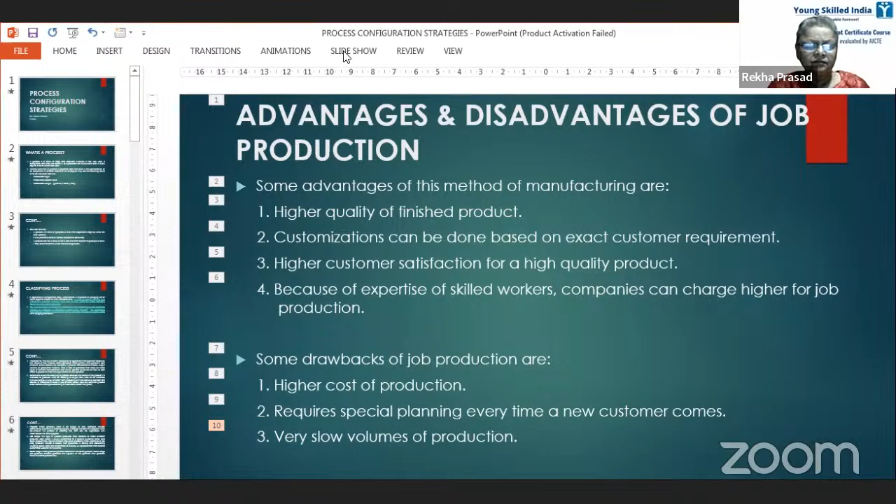Today we'll be doing process configuration strategies. Because as you know, any production or operations management is input, process, and output. In that process, we are adding value to the input, so the output is more valuable than the input, whether you are producing any product or doing any service. This is the basic function of production or operations management.

Now Arshita, you are the only one, so you just read it out. What is a process? Ma'am, I read it. Okay, because you are the only one just now.

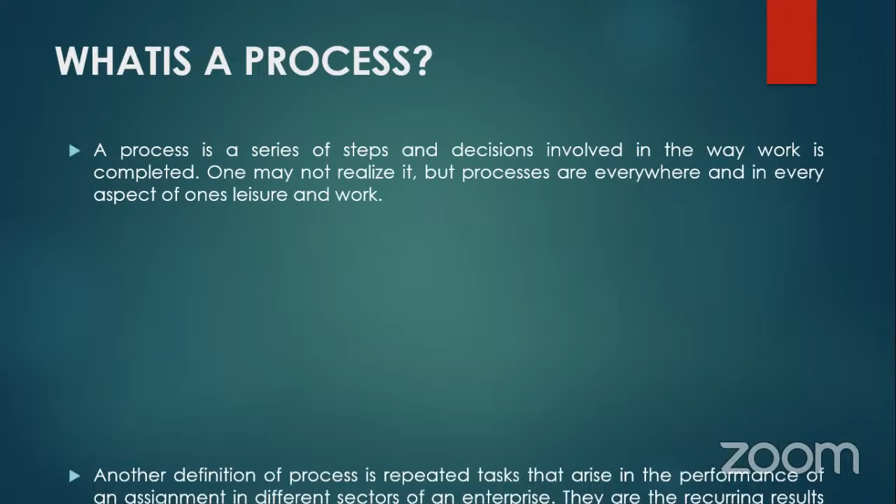A process is a series of steps and decisions involved in the way work is completed. One may not realize it, but processes are everywhere, in every aspect of one's leisure and work. So wherever you are doing something, that process is going on. Even if you are relaxing, listening to music, doing yoga, or enjoying a movie, that process is going on. Whether you are at work or at leisure, process is going on. Even if you are sitting idle, that form of relaxation is also a process, giving you calm and pleasure.

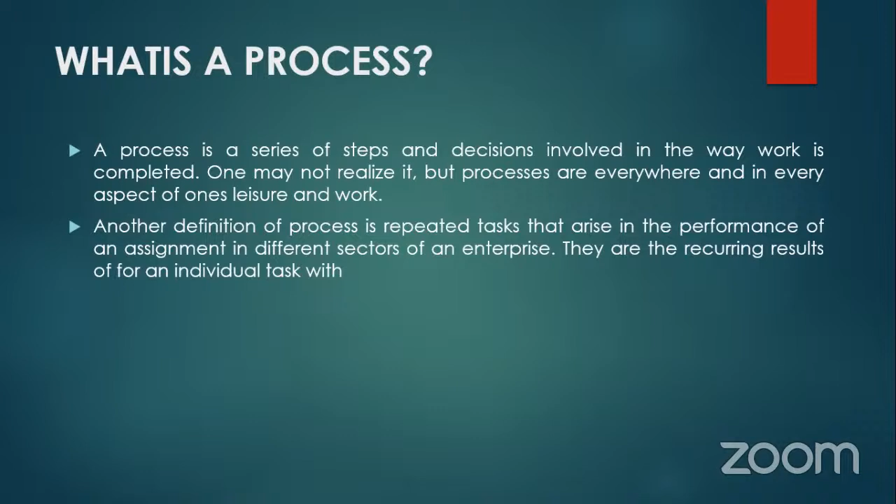Another definition of process is repeated tasks that arise in the performance of an assignment in different sectors of an enterprise. These are the recurring results for an individual task with measurable inputs, measurable added value, and measurable output, given by Fischer in 1993.

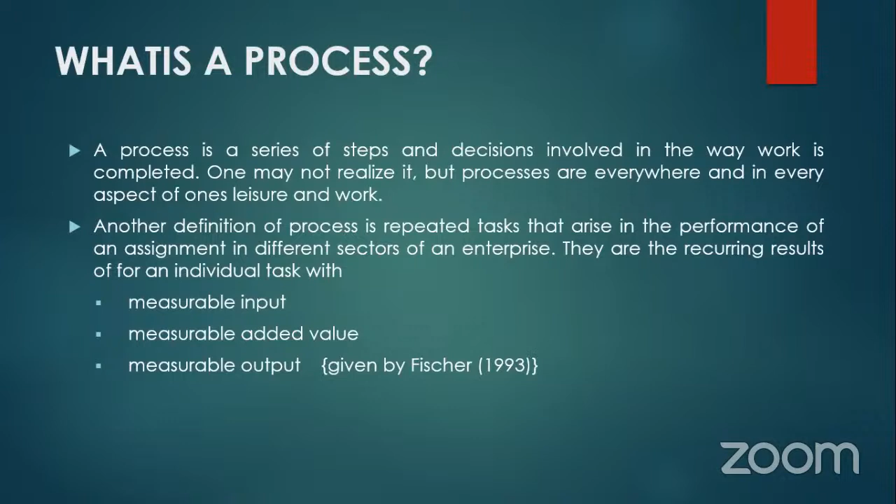So whatever input you are giving, that has to be measurable. Then whatever value you are adding to that during the process, some value is being added to the input, that is also measurable. And whatever output you are getting, that is also measurable. That is what Fischer says, because otherwise, how will you know whether value is being added to the input or not?

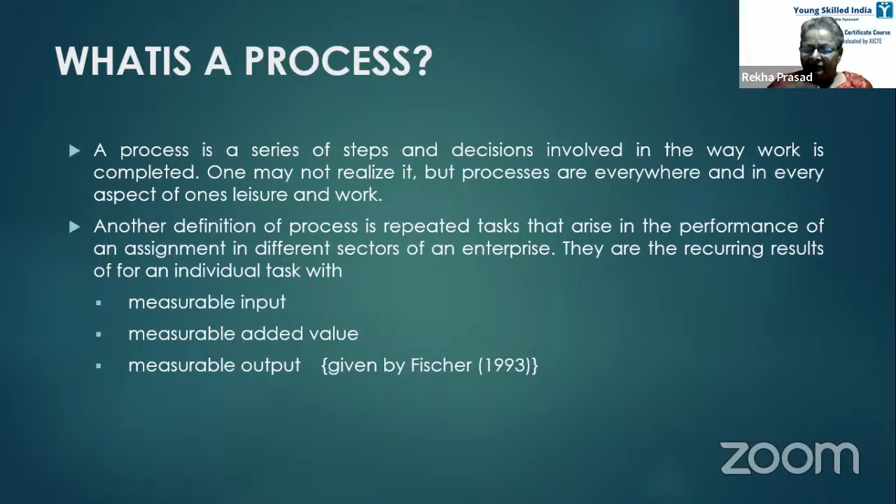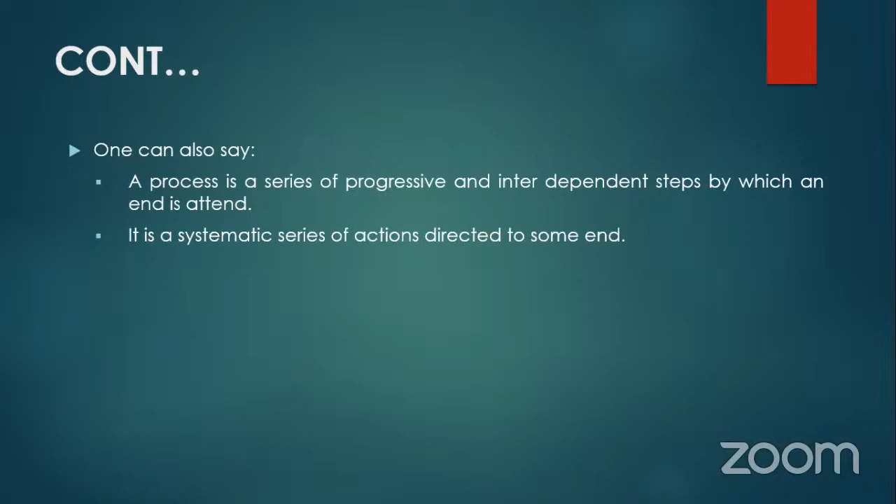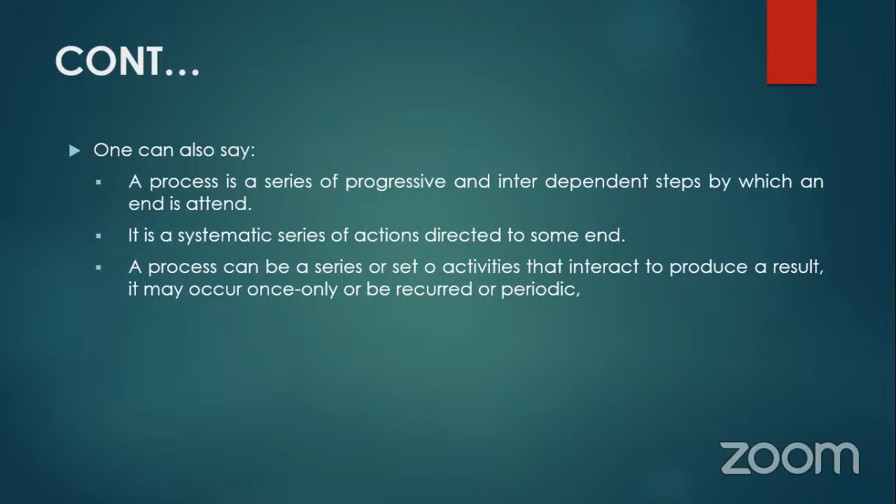One can also say a process is a series of progressive and interdependent steps by which an end is attained. It's a systematic series of actions directed to some end. A process can be a series or set of activities that interact to produce a result. It may occur only once, or be recurrent or periodic. So it is not that the process is not repeatable, it can be repetitive, it can happen only once, or it can be periodic or recurring.

Maybe it is not periodic, there's no definite period. One might happen in the first month, another in the second month, another might happen in the third month, and so on. So it can be anything, but a process is something that keeps on going on. Something is done to the input so that you can get the desired output, that is your goal.

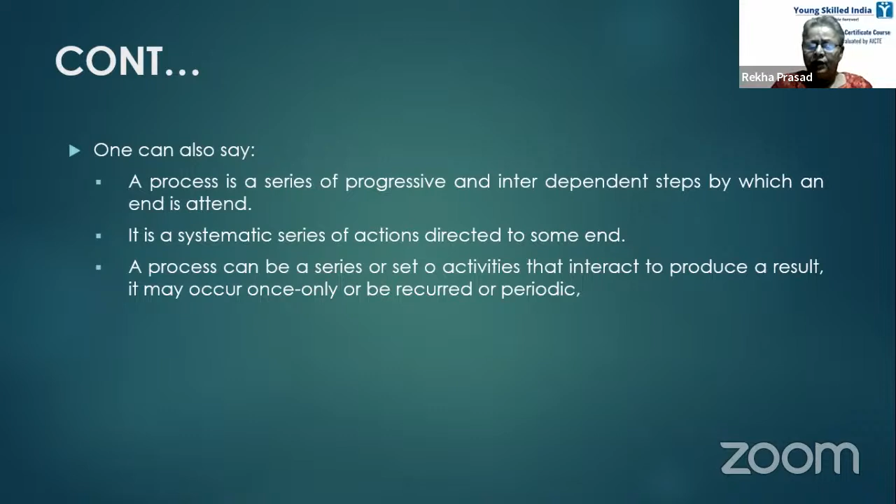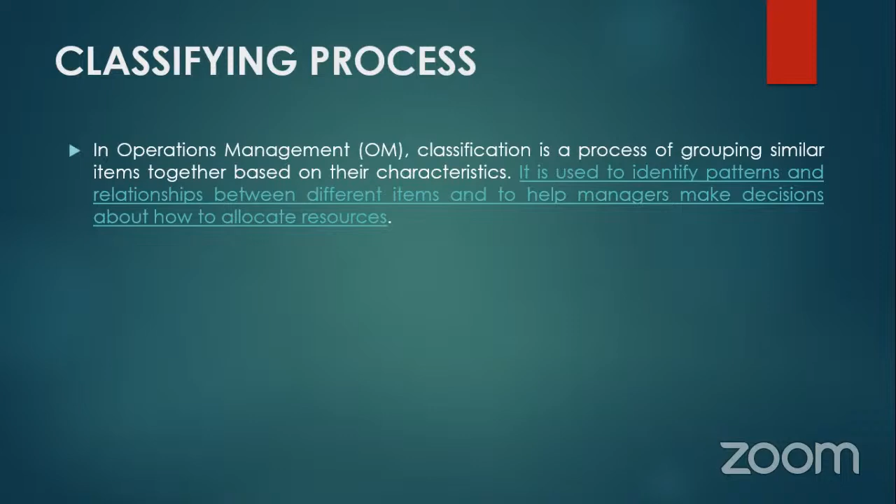Classifying process: in operations management, classification is a process of grouping similar items together based on their characteristics. It is used to identify patterns and relationships between different items and to help managers make decisions about how to allocate resources.

Operations management involves planning, organizing, coordinating, and controlling all the resources needed to produce a company's goods and services. The operations management process involves smart use of resources and data to reach goals while keeping costs down. This we have been repeatedly saying, that you have to do everything efficiently and effectively so that you keep costs at the lowest level and quality at the highest level. That is the goal of a good operations management process.

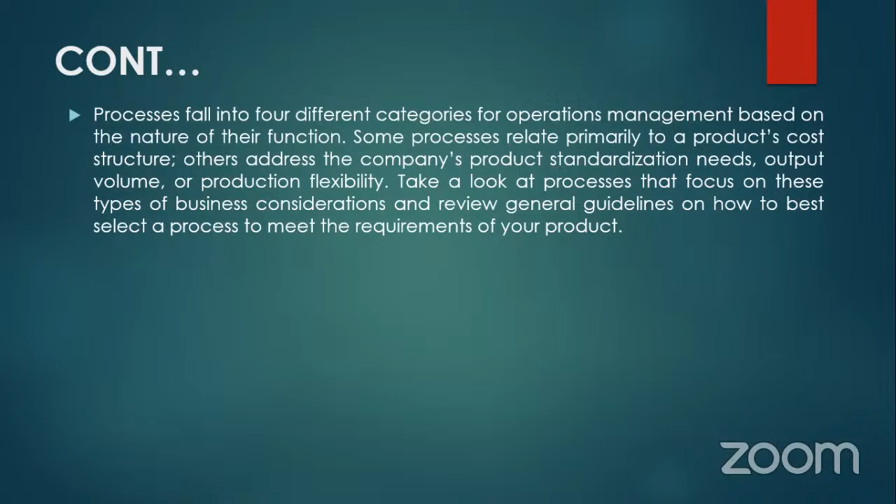Processes fall into 4 different categories for operations management based on the nature of their functions. Some processes relate primarily to the product cost structure. Others address the company's product standardization needs, output volume, or production flexibility. Take a look at processes that focus on these business considerations and review general guidelines on how to best select a process to meet the requirements of your product. So there are 4 types of processes. It will depend upon the product and what type of quality you require, why you require it. All those things matter a lot. So these are the 4.

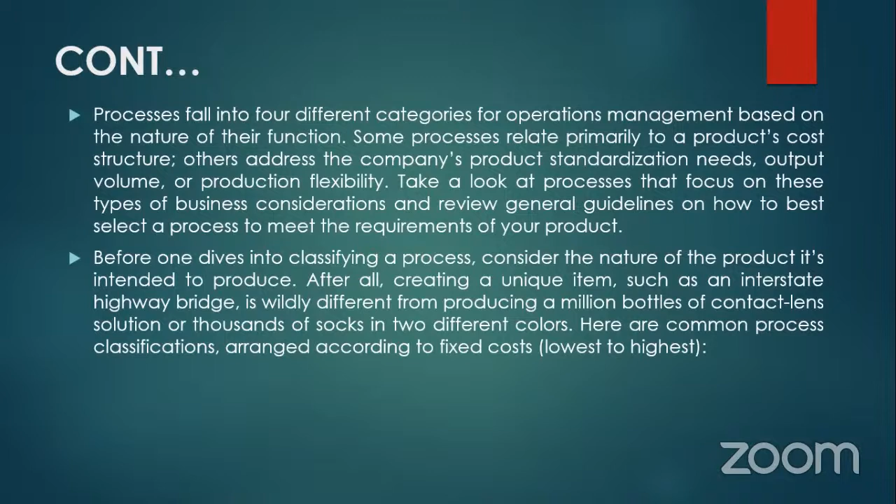Before one dives into classifying a process, consider the nature of the product it's intended to produce. After all, creating a unique item such as an interstate highway bridge is wildly different from producing a million bottles of contact lens solution or thousands of socks in two different colors. Here are common process classifications, arranged according to fixed cost, lowest to highest. So it depends upon the product. Naturally, when you're making a highway, that product is much different from making something in mass production like bottles or socks.

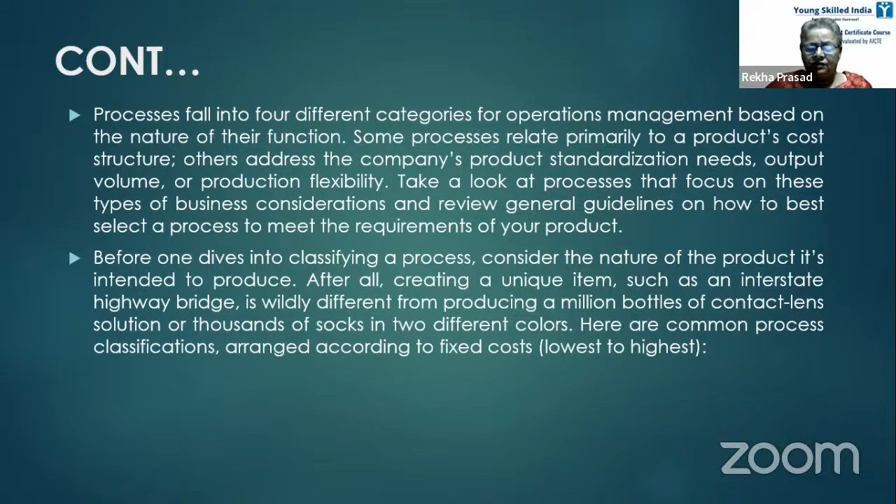The first process is projects. These generally result in an output of one. Examples include constructing a building or catering a party. Although the result of a project is one deliverable, the process of creating the item can be duplicated with modifications for other projects. A project is something which has a definite start and a definite finish.

Like naturally catering to a party, you're throwing a party, say for example a birthday party. So naturally there will be a start, from the day you start planning for it. And then once the party is over, it will end.

It is not ongoing. For example, making a road is a project because there will be a start date and a finish date. But taking care of the road is ongoing, so that is not a project. Constructing a building, that is a project, but keeping the building, the upkeep of the building, that is not a project.

We'll do projects in much more detail later on, how projects are built, what techniques are used to make a project. Here you just remember that one of the processes is projects.

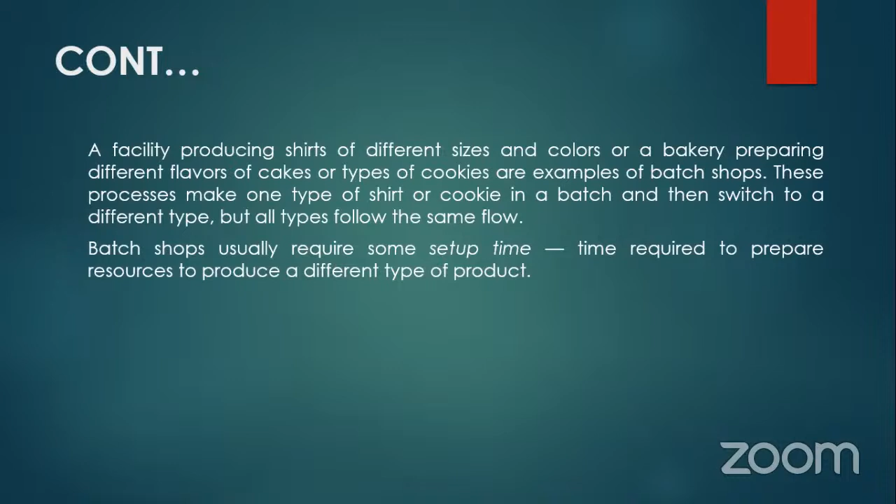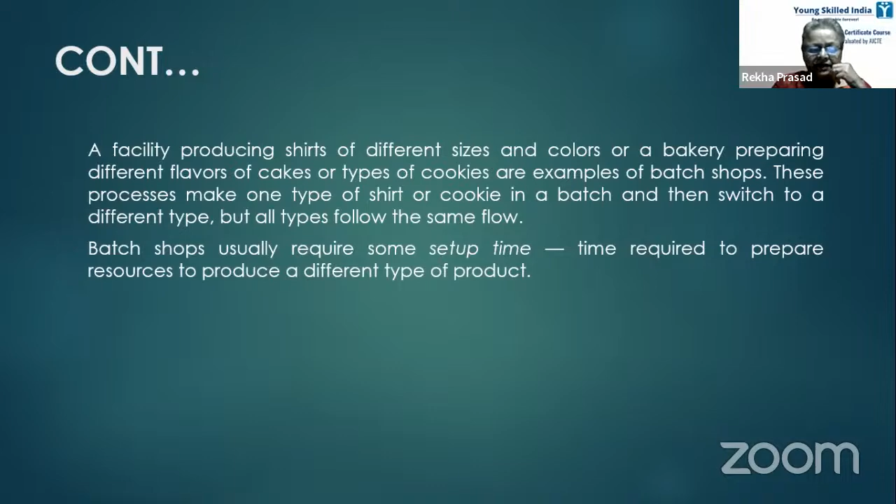So they can fall in both. If they are doing it in batches, then they'll fall in the batch shop process. And if they're doing it for a particular customer, then they'll fall into job shop processing. Then you have flow lines.

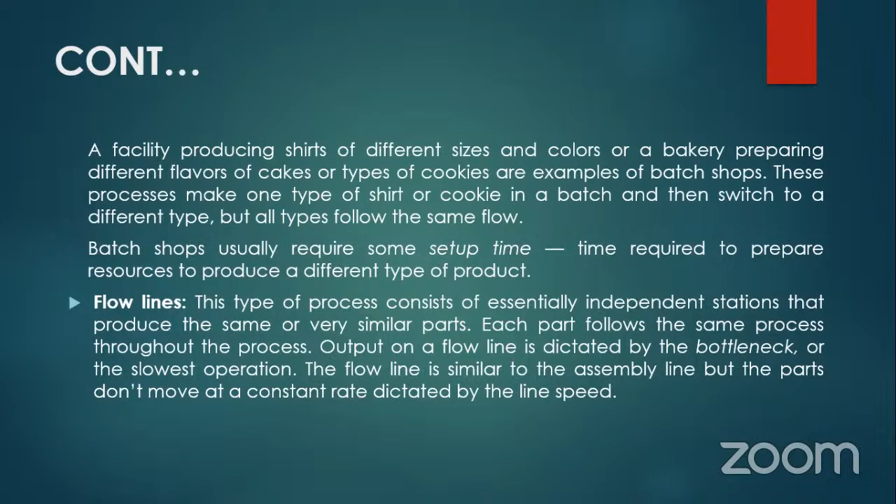This type of process consists of essentially independent stations that produce the same or very similar parts. Each part follows the same process throughout. Output on a flow line is dictated by the bottleneck or the slowest operation. The flow line is similar to the assembly line, but the parts do not move at a constant rate dictated by the line speed.

So just like you have an assembly line where automobiles are being produced, similar products flow in a line and it is mass produced. So this is the same thing - from job, it was a single item. In batch, the same item, but it is in a batch. And in flow line, it is continuous - the same thing is being produced continuously.

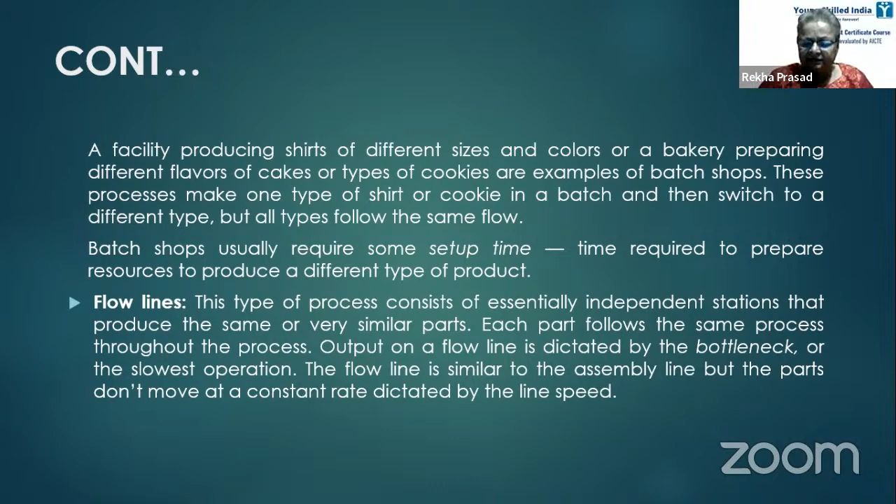Process is dependent on product. Production is about creating goods or services - either you're producing goods or you're producing services. So how you do the whole layout, the location, everything - the manager has to decide on the efficient way of organizing production for their particular product. Efficient means least wastage - whatever is required, that many things only you procure and then you produce it, so that there is least wastage.

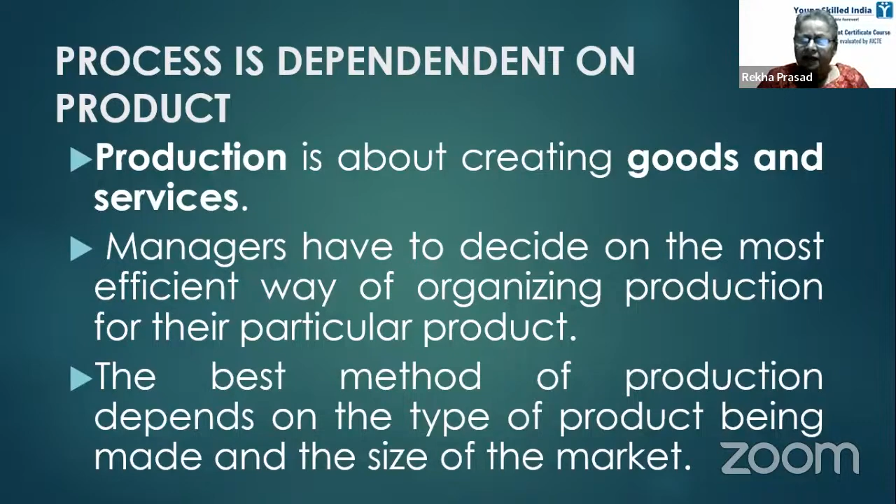The best method of production depends on the type of product being made and the size of the market. Naturally, if the size is large, like for example today there is a large market for ready-made products, because people, even though they have to make some customization, they can do it individually, but because of the price and the quality, they go for mass production.

So we have already seen that there are 4 types of process, so naturally there are 4 types of production. Now Harshita, you read it.

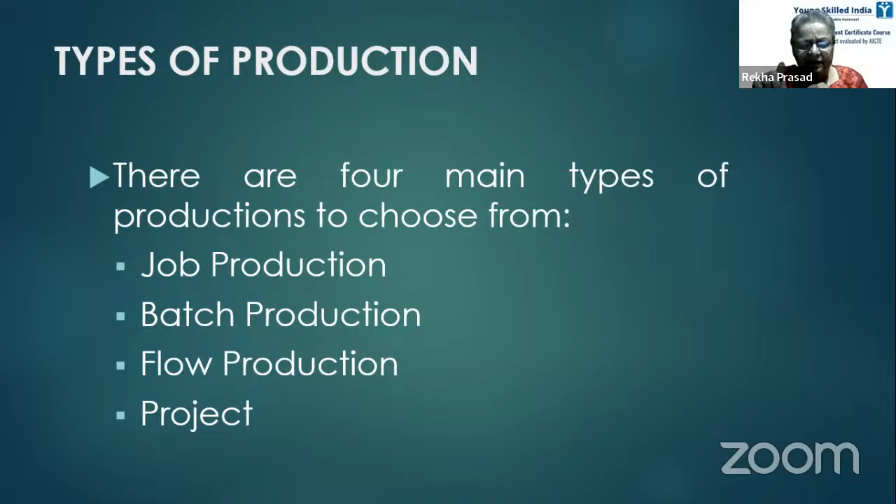There are 4 main types of productions to choose from: job production, batch production, flow production, and project. At present we won't be doing project in detail because there is another chapter on project management, so everything will be done in detail when we are covering that portion.

Like you have discrete variables, where each point is separate from the other - there's a 1, 2, 3, 4, 5, 6, 7, 8. These are all discrete variables. But when these become 1.1, 1.2, 1.3, it will become closer, these things will become more continuous. Okay, now suppose here you have a group 1.001, 1.002, it will be still closer. So from discrete...

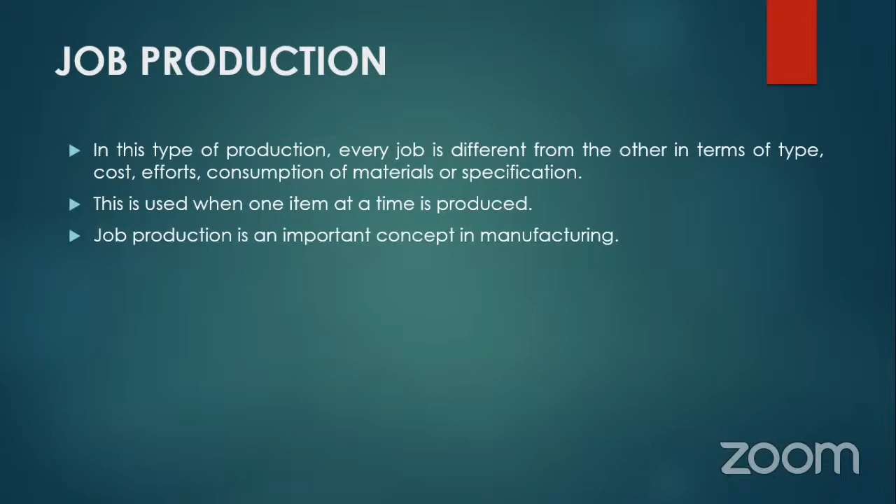Job production is an important concept in manufacturing. It is driven by the exact need or requirement of a customer. Depending upon the need, the team of workers produces the product or goods specifically for the customer. Job production basically focuses on low volume of production but offers a high variety of the finished product. So naturally, volume is low because one at a time you are producing only one item, so volume will be low but quality will be high.

Examples of job production? Some examples of job production to create customized products for customers are: building construction is a job production where each building has a different architecture, design, landscape, geography, investment, material, etc. Creating customized clothes like wedding gowns, tuxedos require custom planning, design and execution, and uses the expertise of a tailor to stitch these special clothes.

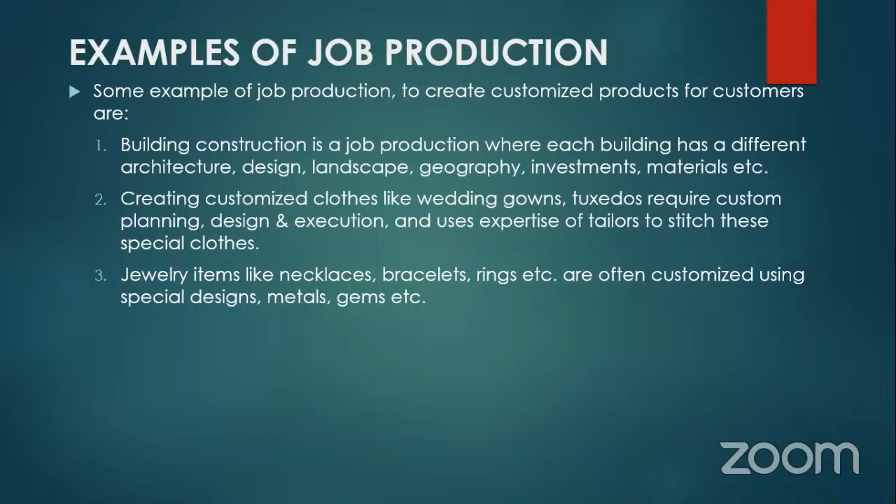Jewelry items like necklaces, bracelets, rings, etc. are often customized using special design, metal, gems, etc. So over here also we are now moving from job production to batch production. Maybe in one batch similar type of necklaces will be produced, and another bracelets will be produced, so maybe two people can buy the same type of necklaces and same type of bracelets. Now that is possible, but there was a time it was totally job production - the efficient craftsman used to work on a particular necklace or bracelet and designed it and produced it the way the customer wanted it.

So how you are seeing it, from job we have gradually moved to batch production, and from batch production to flow production. So all these examples above show the use of job production to manufacture niche products. So it is not for everyone, it is for some particular customer needs - it is niche, it is not mass, for the niche.

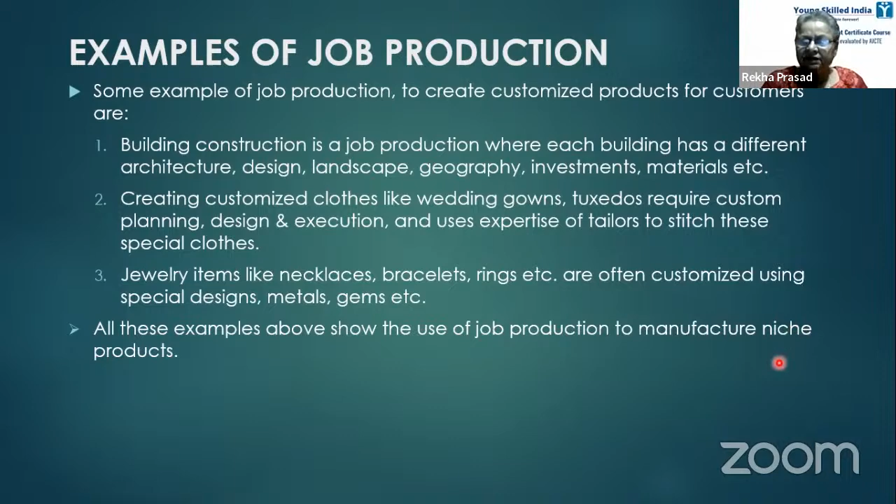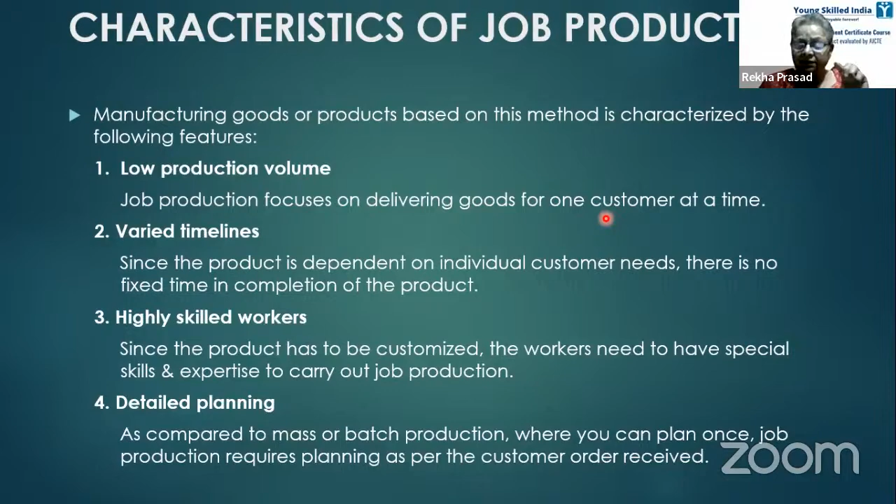Detailed planning, because it is done for one particular item. So detailed planning has to be done for that particular item.

So what are the advantages and disadvantages of job production, Harshita?

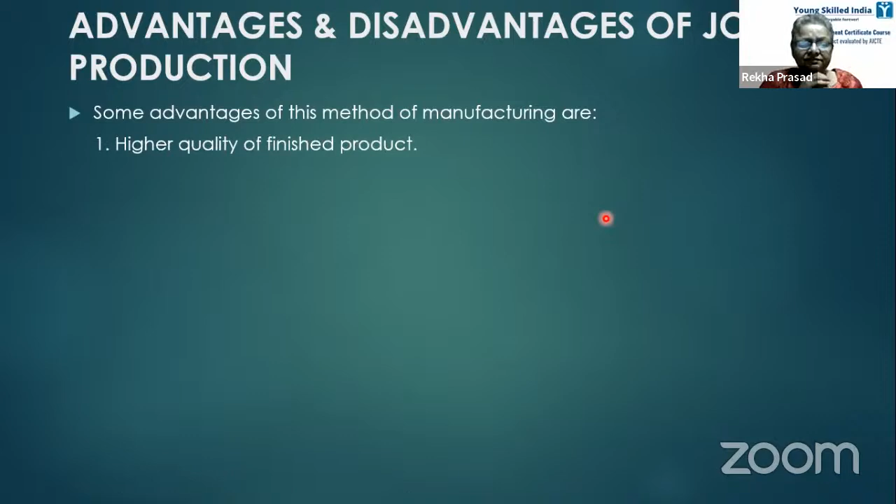Yes ma'am. Some advantages of this method of manufacturing are higher quality of finished product. Customizations can be done based on exact customer demand. Higher customer satisfaction for a high quality product. Because of the expertise of skilled workers, companies can charge higher for job production.

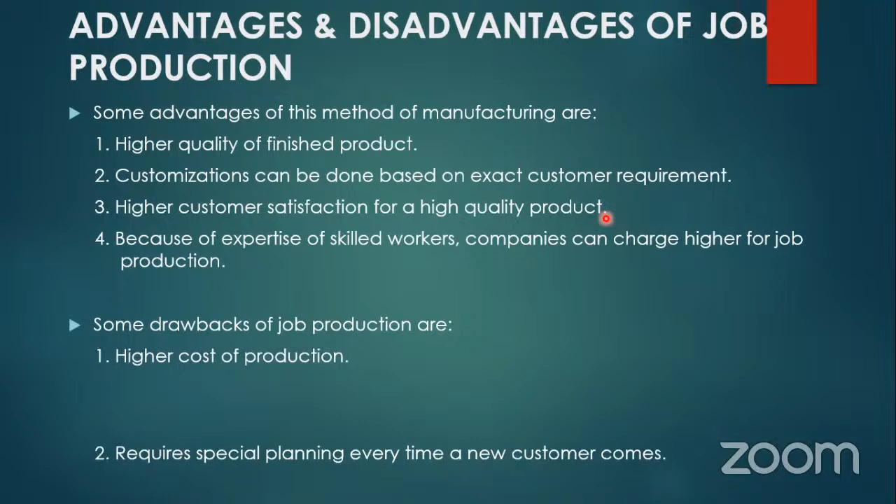Some drawbacks of job production are higher cost of production, requiring special planning every time a new customer comes, and a very low volume of production.

Now Praveen has come. So Praveen, you read.

Yes ma'am. Job production is an important concept in manufacturing. It is driven by the exact need or requirement of a customer. Depending upon the need, the team of workers produces the product or goods specifically for the customer.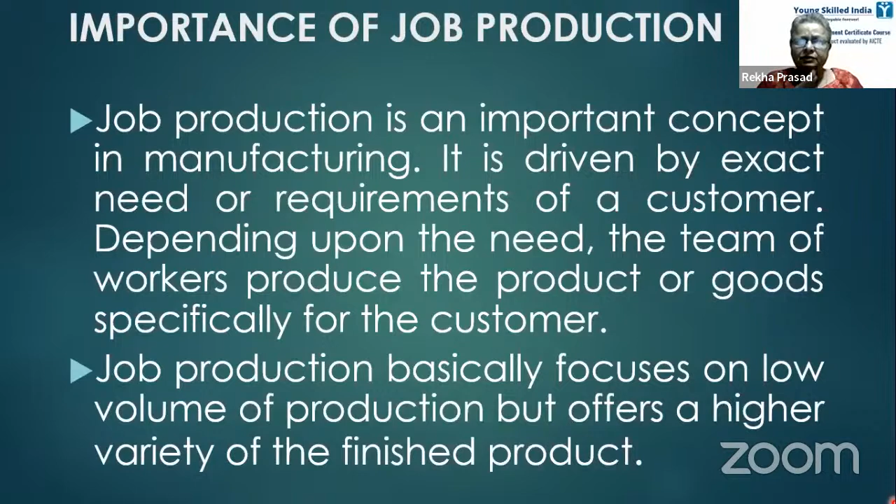Job production basically focuses on low volume of production but offers a higher variety in the finished product. See, in a customized batch you can get 10 shirts, but they are of similar design—maybe you like the collar but not something else about that shirt. In some other batch you might like something, you might not. So it won't be entirely to your taste. But if you go to a tailor, you get a shirt designed according to your taste. That is the basic difference between job production and batch production.

Now Praveen, you continue. Yes ma'am. Kindly describe batch production.

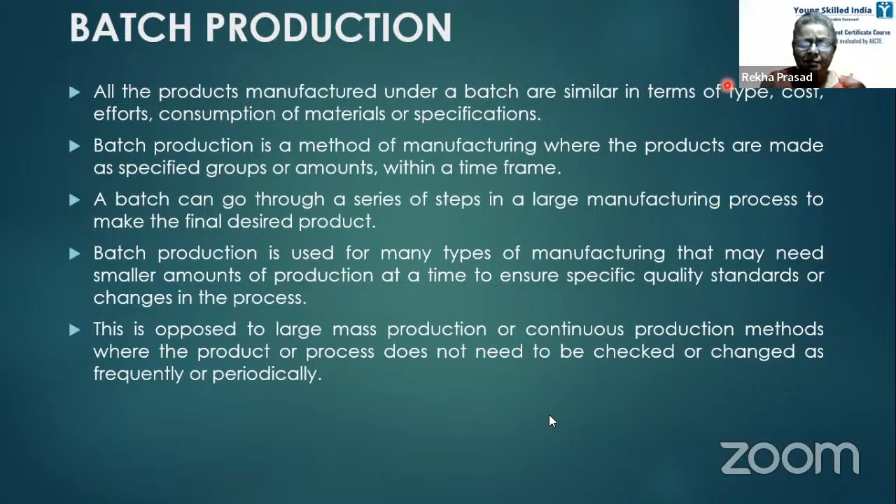So here for one particular batch, same process is used, same material is used, same specifications, planning is done for them. For example, if you're making one batch of cookies, each cookie will be similar.

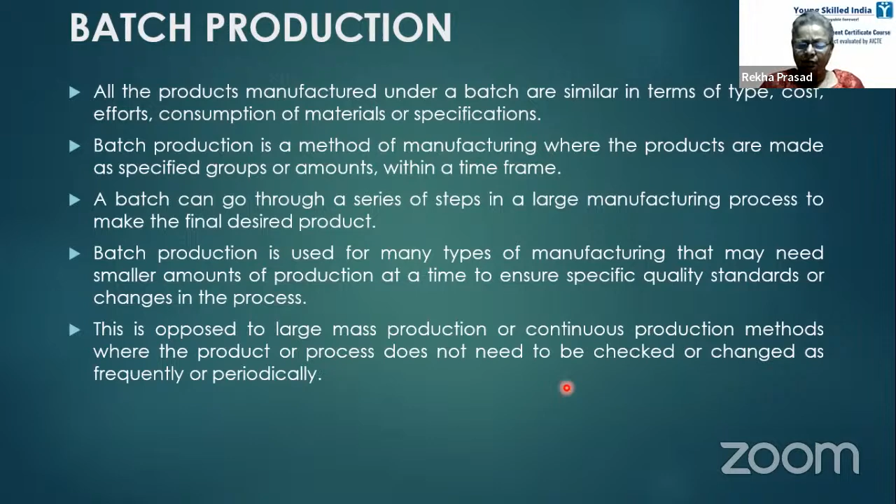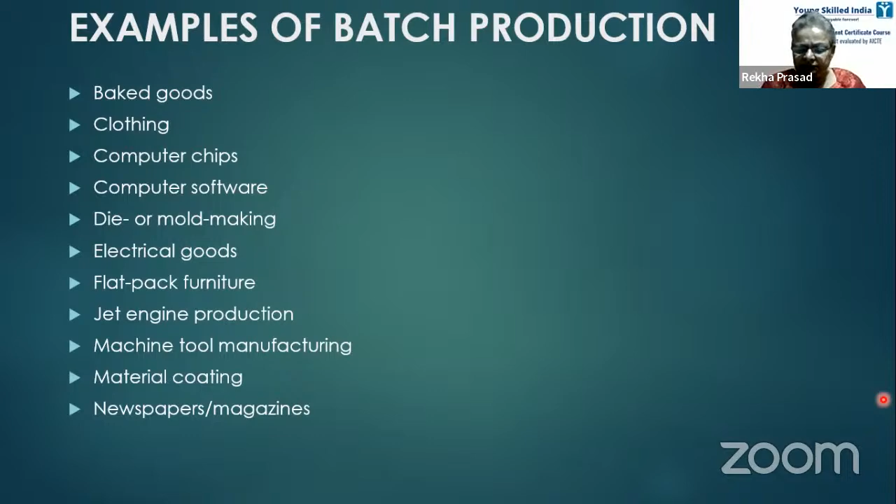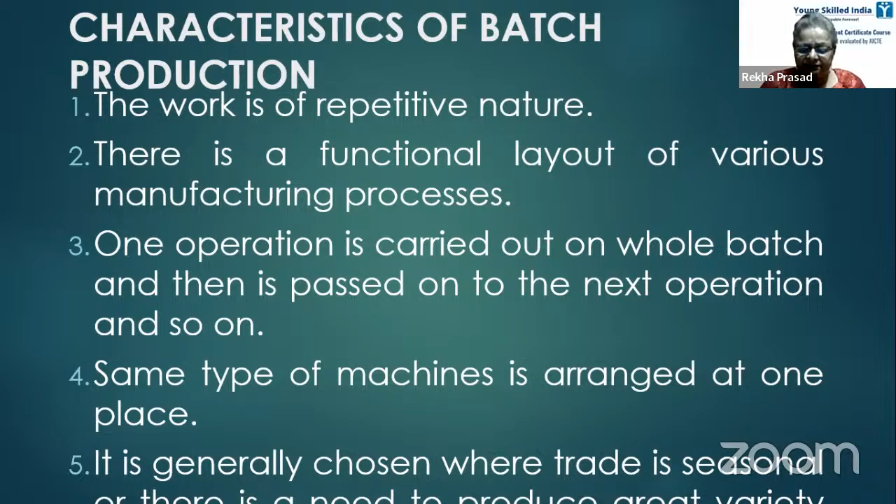What are the advantages and disadvantages of batch production?

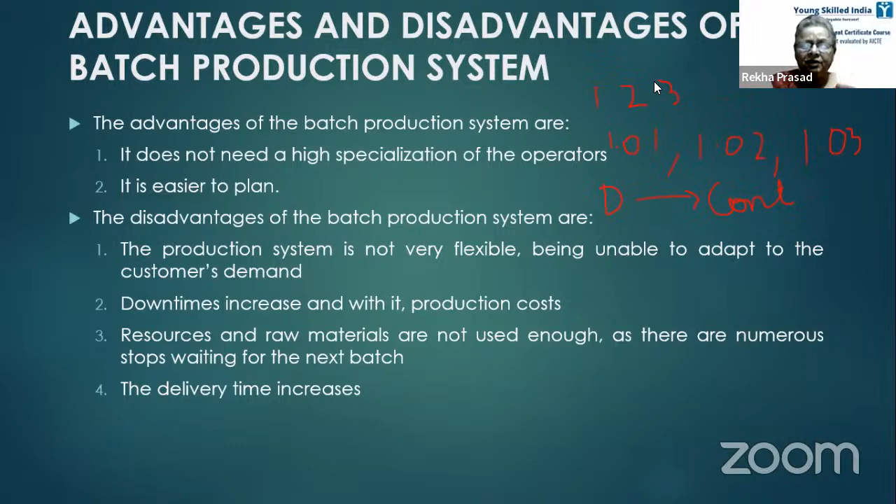Why it is so important? प्रवीण के बाद कोई और आया?

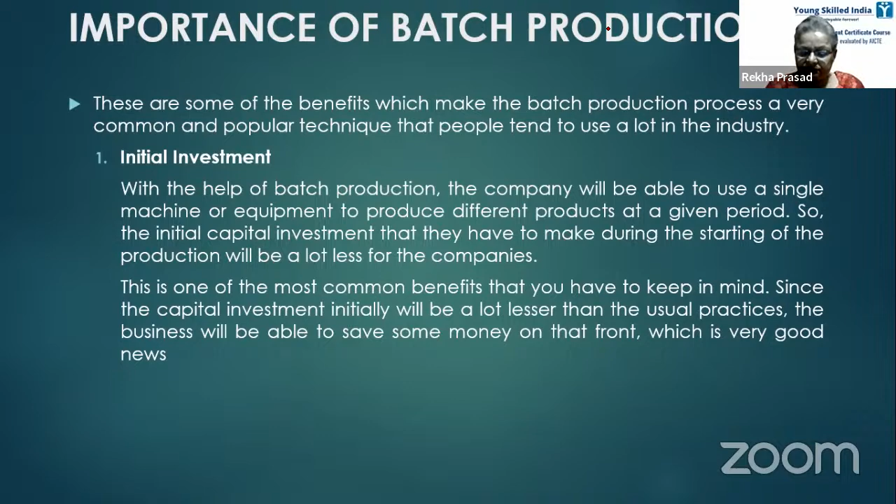Yes, Praveen. Ma'am, I will read. Okay.

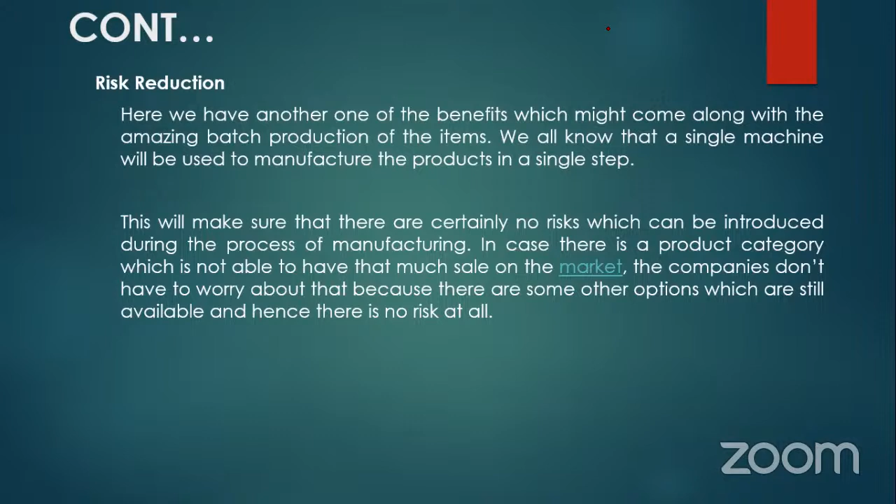Risk reduction. Here we have another one of the benefits which might come along with the amazing batch production of the items. We all know that a single machine will be used to manufacture the products in a single step. This will make sure that there are certainly no risks which can be introduced during the process of manufacturing. In case there is a product category which is not able to have that much sale on the market, the companies don't have to worry, because there are some other options which are still available, and hence there is no risk at all.

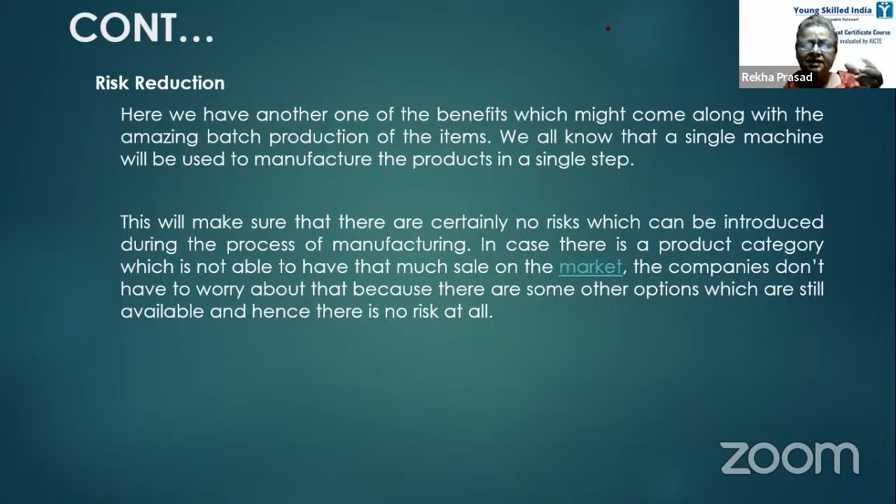And then the third importance is...

Great for seasonal products. One of the most important things that the manufacturer has to do is provide seasonal products so that the customer can use them. Those companies which use the batch production method are the ones that are greatly benefited from it when they have to make seasonal products for the customer. They can create some large batches of the product and then switch their machinery so that they will be able to use it in the next season. Now that is a benefit which is very important to consider in the case of batch production.

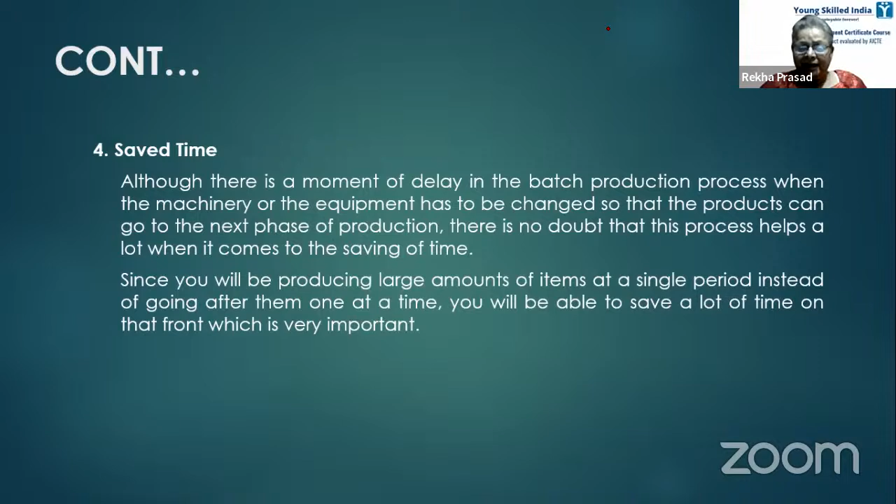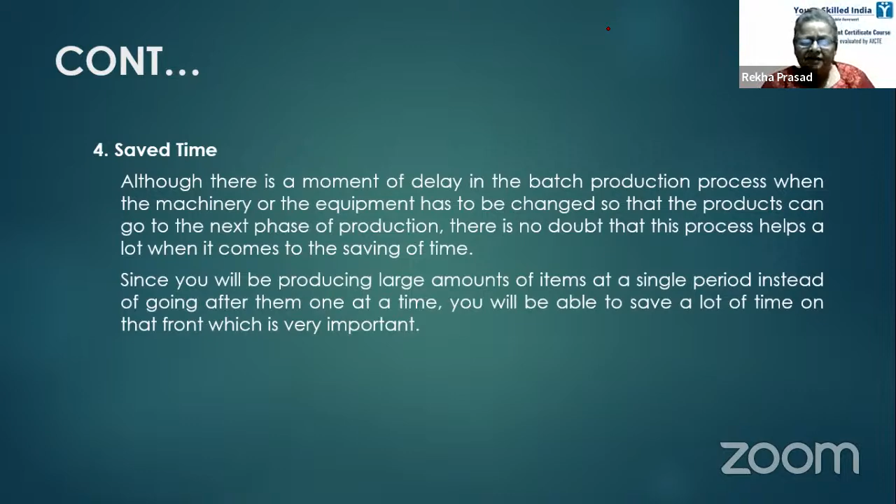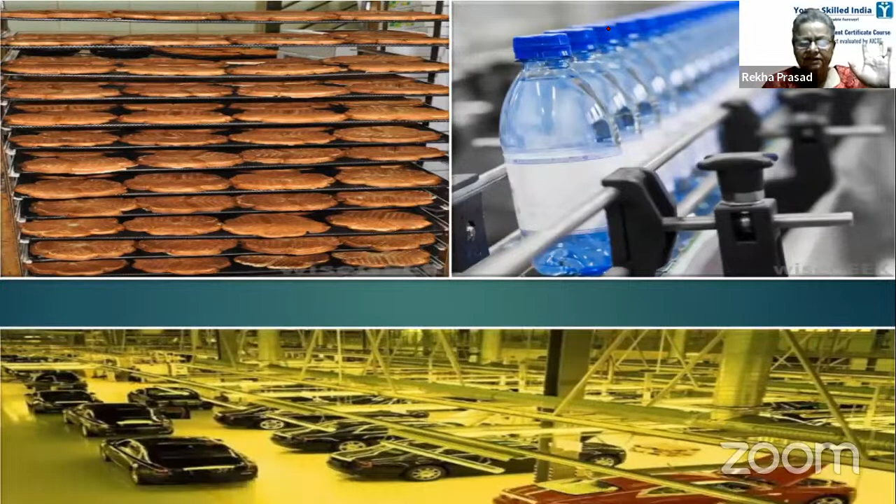So this is a batch. Cookies का एक batch है। This is bottles का एक batch है। Cars का एक batch है। So this is batch production.

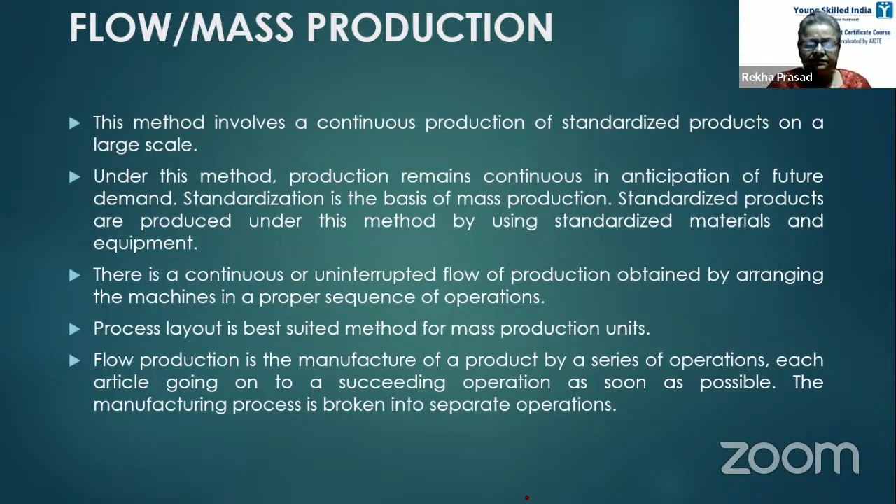जैसे examples हैं car assembly plant, bottling plant, bicycle production line.

Characteristics of flow production: Praveen, you read. The mass or flow production possesses the following characteristics: the unit flows from one operation point to another throughout the whole process. There will be one type of machine for each process. The products, tool, material, and method are standardized.

Production is done in anticipation of demand. Production volume is usually high. Machine setups remain unchanged for a considerably long period. Any fault in the flow of production is immediately corrected, otherwise it will stop the whole production process.

So production, different operations होते हैं, different steps होते हैं, but for the whole mass, the same thing is going on. So similar machines are used for each process. The same tools and materials are used. Standardization यहाँ हो जाता है।

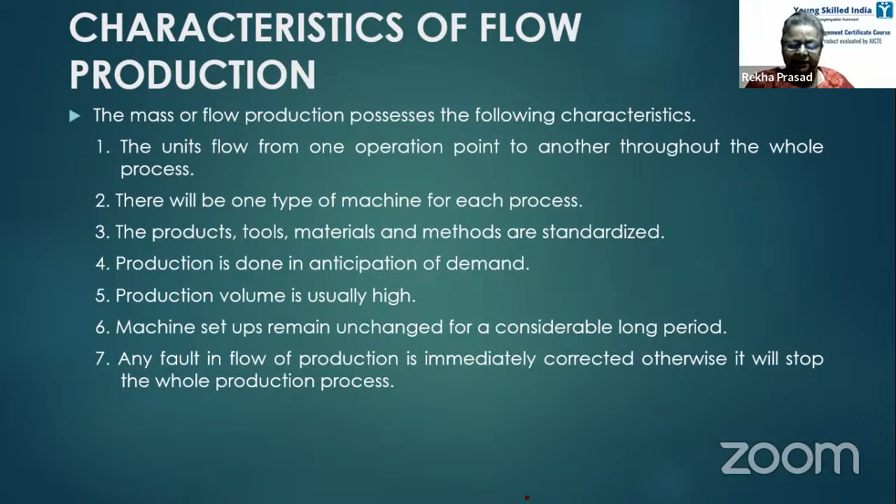Advantages and disadvantages of flow production. Increase productivity - mass production makes it possible to manufacture large volumes in less time.

There was no need for workers to run around gathering supplies or tools when manufacturers use mass production techniques. To illustrate this point, consider iPhones. At a manufacturing site in China, it takes about 400 steps to assemble an iPhone. Nevertheless, the plant can produce 500,000 iPhones a day, or about 350 a minute, with the use of an assembly line and advanced technology. Would it be humanly possible to produce over 300 phones a minute?

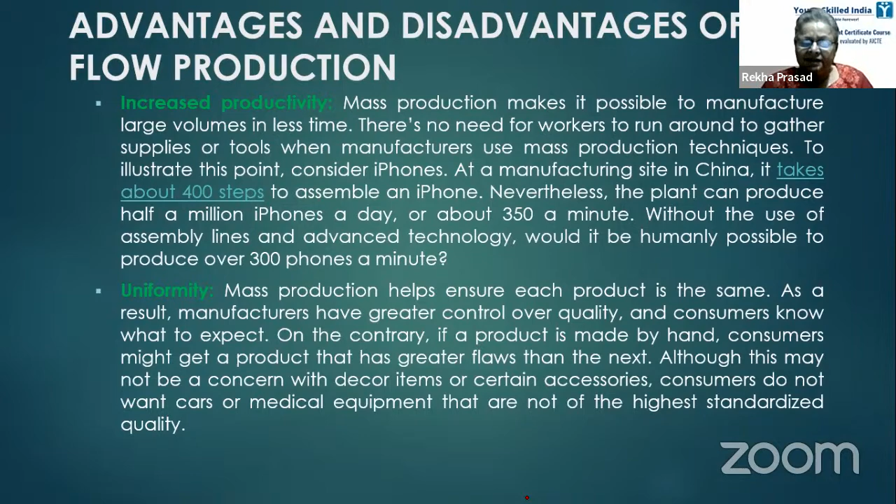So uniformity is very essential in mass production. Then another benefit is lower cost. Mass production enables companies to produce large quantities with fewer workers. Instead of having to pay several workers to complete a task by hand, manufacturers use machines to produce goods much faster. This allows companies to sell their products at a lower cost without losing profit.

Higher quality of life. Due to mass production, more people can afford products that make life easier and more comfortable. Consumers can afford new shoes, clothes, household items, and other goods when they need them rather than having to wait to save up enough money. When common goods are less expensive, people can save money and build their wealth in other ways.

So you can see that with mass production, cost has also gone down and the quality of life has increased. Because of mass production, things have become cheaper. So for their day-to-day needs, people don't have to pay the same prices they were spending earlier, and they had to wait to gather that much money to pay for it. So this has made life better.

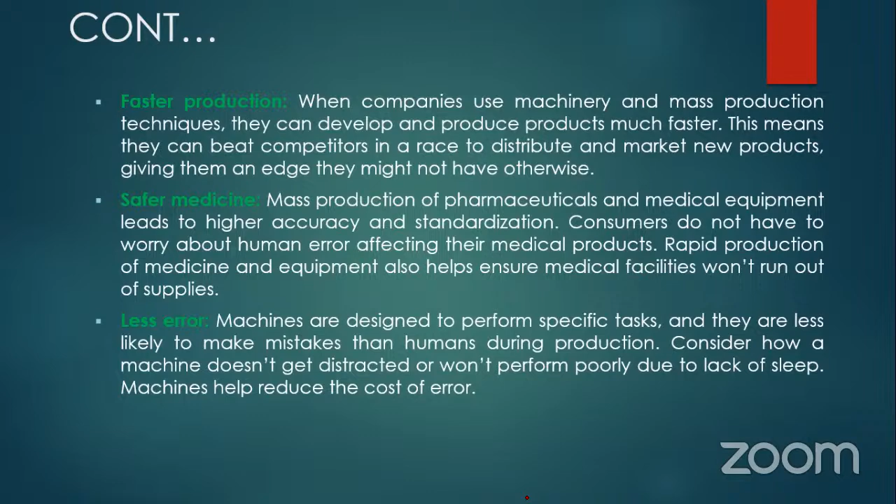Less error. Machines are designed to perform specific tasks and they are less likely to make mistakes than humans during production. Consider how a machine doesn't get distracted or perform poorly due to lack of sleep. Machines help reduce the cost of error.

So you can see it leads to faster production, it leads to safer medicines. Today, because of mass production, the amount has also increased, and the durability, the safety, all these things have increased. There is less chance of making error.

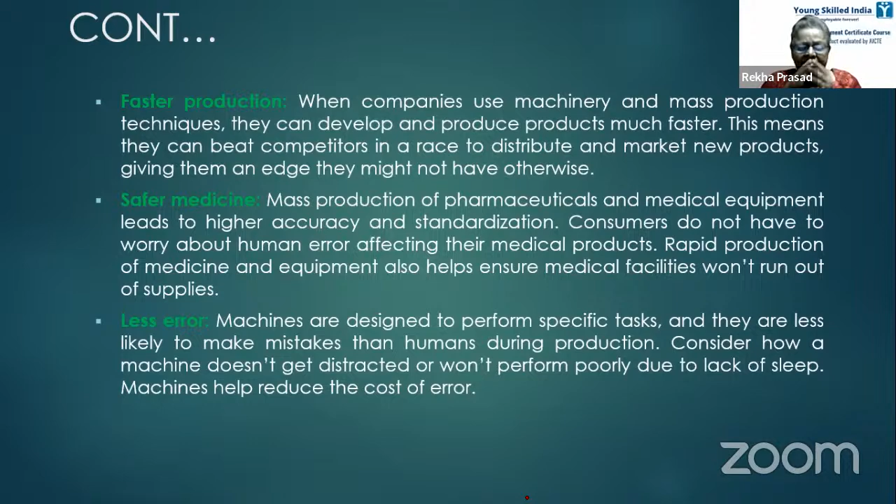Job specialties. The Industrial Revolution and mass production have led to the creation of specialized jobs. For example, factory workers are trained to perform highly specialized tasks. Employers benefit from hiring skilled and efficient employees, and employees develop marketable skill sets. Employees with specific skills may also feel secure in their careers because they are harder to replace.

Mass production has also helped create jobs for individuals to teach special skills and train workers. Lastly, mass production has created jobs for workers to repair machinery or make improvements.

Increased worker safety. Manufacturers who mass produce goods often employ automation technology to complete strenuous or dangerous tasks. For example, robots used in mass production can safely handle and assemble large and heavy parts. This helps keep employees safe from accidents or injuries.

Rapid evolution. Imagine a world where everything was still made by hand and produced in small shops. This is how it was before the Industrial Revolution, and it took a lot longer to spread new products and ideas than it does today. Mass production speeds up evolution across all industries, and one innovation leads to the next.

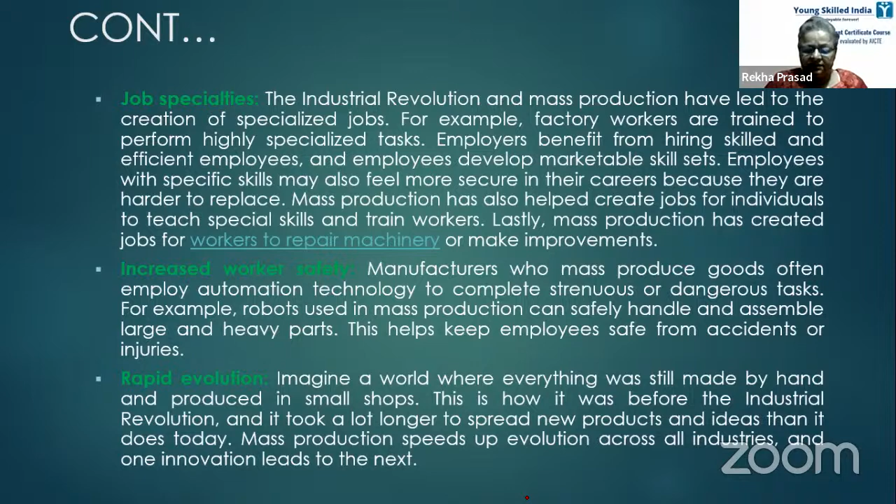Now, what are the disadvantages? Praveen, you read. Praveen, are you there? Yes, ma'am.

Initial cost. It takes a lot of capital and time to build a factory equipped with specialized machinery. Specialized machinery costs a lot of money, and so does the factory floor space needed to hold assembly line machinery. Initial cost can make it hard for a smaller business to mass produce their products. However, it is a worthwhile investment for companies who are confident their sales and productivity can cover the initial cost.

Less flexibility. A factory manager cannot walk up to a machine and ask it to stop what it's doing and complete a different task. Specialized machinery used in mass production is designed to do one specific job. This level of inflexibility can sometimes be problematic. For example, if there's an error in production, companies may have to redesign their process.

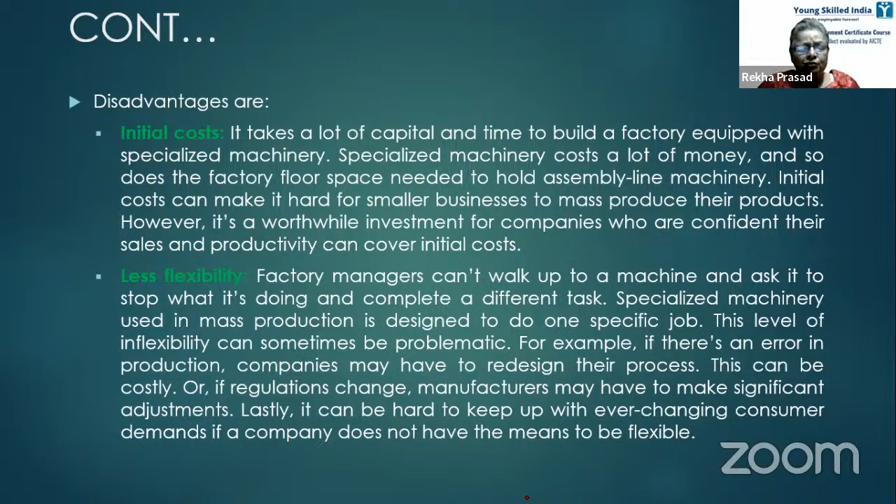Then there can be less flexibility because every machine is specialized. If there's something wrong with it, you cannot stop it and start doing something else. You have to design the machine in such a way that if something goes wrong, it should be changed properly, and certain efforts should be done. So flexibility has also to be designed into it.

It uses a lot of energy also. That is why our whole growth is dependent upon the energy sector, and that is why so much research is being done on alternative energy sources like wind energy, solar energy, so that we are not dependent on fossil energy. So electrical energy is also being produced through solar energy.

Then pollution, it also leads to a lot of pollution, but measures are being taken to mitigate these pollutions. Simply said, factories cause pollution. During the Industrial Revolution, for example, factories polluted the water and air by burning coal and producing metals and chemicals.

But there's one very sad part: all the polluting companies are being pushed into the third world. The developed countries don't want any pollution. They want the fruit, but not the pollution. Just because the developing countries require this, they are bound to cater to all the polluting companies. They also directly release pollutants into rivers and streams.

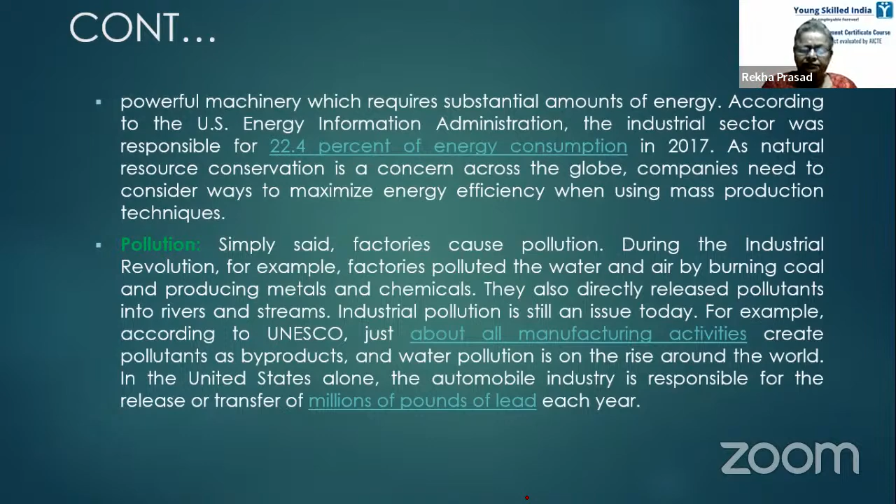Affects employees' wellbeing. Mass production and assembly line involve repetitive work. Factory employees may spend their entire shift standing in the same spot doing the same task over and over. This can leave employees feeling unmotivated, bored, or isolated. Repetitive motion can also lead to conditions like carpal tunnel syndrome, when employees feel unappreciated or unfulfilled.

Factories face high turnover rate, lack of production uniqueness. Mass produced goods lack uniqueness. In today's world, many consumers want customized products that feel personal and express their identity. Some manufacturers offer customized products while others do not have the capability to mass produce custom goods. As consumer demand for customized products continues to grow, manufacturers will need to adopt new technology like 3D printers to evolve.

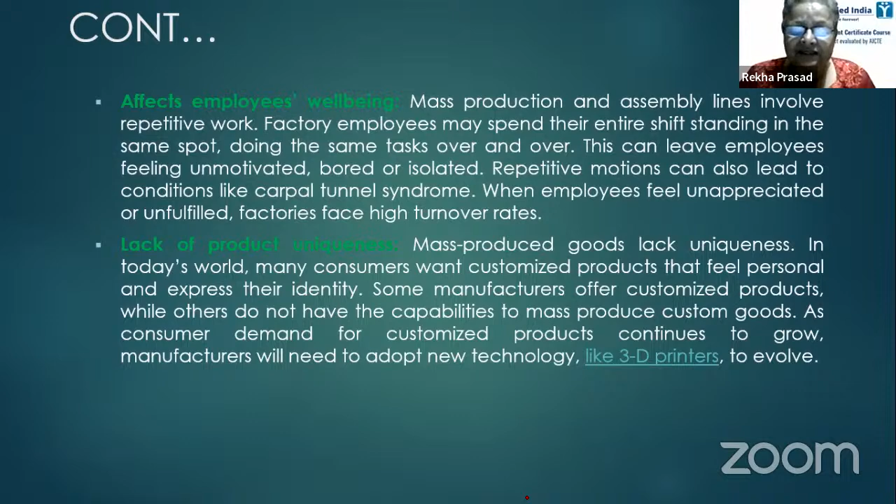हाँ, चाह कर भी आप रिलैक्स नहीं कर सकते। जी मैम, मगर टारगेट्स, डेली टारगेट्स वो अचीव करने ही करने हैं। बात यह है कि जब हम पढ़ाते हैं तो we talk about ideal situation, वो एक्चुअल लाइफ में होता नहीं है। बट दैट इज, यदि फ्यूचर में things might change। जैसे कुछ आईटी कंपनीज में, even I have not seen myself, whatever I have read, that they are given certain time for their own self, so that they can relax and work better।

ये भी है कि एम्प्लॉयज उसको किस तरह यूजफुली यूज करते हैं या नहीं करते। जैसे हमारे यहाँ टीचिंग में इतना ज्यादा नहीं है, जैसे I was in a university, तो वहाँ इतना ज्यादा नहीं कि you have to be there at this time and leave it at this time, ऐसा कुछ नहीं है। You come for your class and you go, but उसमें भी लोग are not very sincere, so this has a negative effect on the students. So it is a two-way process।

Yes ma'am, anything is a two-way process. आप भी उसको कितनी ईमानदारी से यूज करते हैं, दूसरा भी आपकी तकलीफ को कितनी ईमानदारी से समझ सकता है। And that is what I feel, I don't know, I might be wrong.

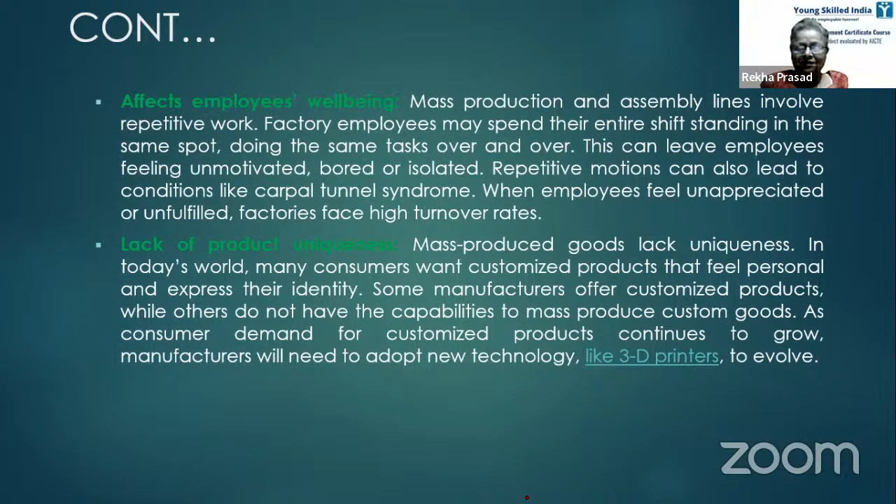It affects employees, leading to unhealthy habits. Mass production can reduce the need to perform labor intensive tasks as machines do the grunt work. Fewer people need to engage in physical activity. For example, farmers can plant and harvest crops using mass produced machinery rather than doing farm work by hand. Likewise, mass-produced cars enable many people to drive to work instead of walk.

Although mass production techniques have increased safety in many instances, they have also led to a sedentary lifestyle for many. Lastly, mass produced food, which is often high in fat and salt, has become part of an unhealthy diet for many Americans. And unhealthy diets increase the risk of disease related to obesity.

अब क्या होता है? मास प्रोडक्शन में अनहेल्दी हैबिट्स बहुत ज्यादा हो जाते हैं, क्योंकि जो हम लोग पहले हाथ से करते थे, अब लोग क्या करते हैं, they'll go to a gym। उनसे कहो कि सट्टी तक पैदल चले जाओ तो they will not go. उसके लिए भी या तो उनको कार चाहिए या मोटरसाइकिल चाहिए, but they'll go to the gym and spend some time.

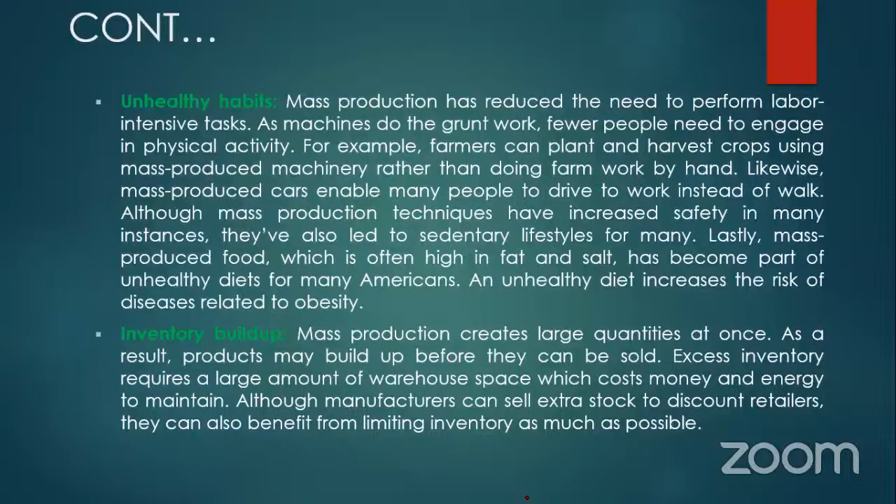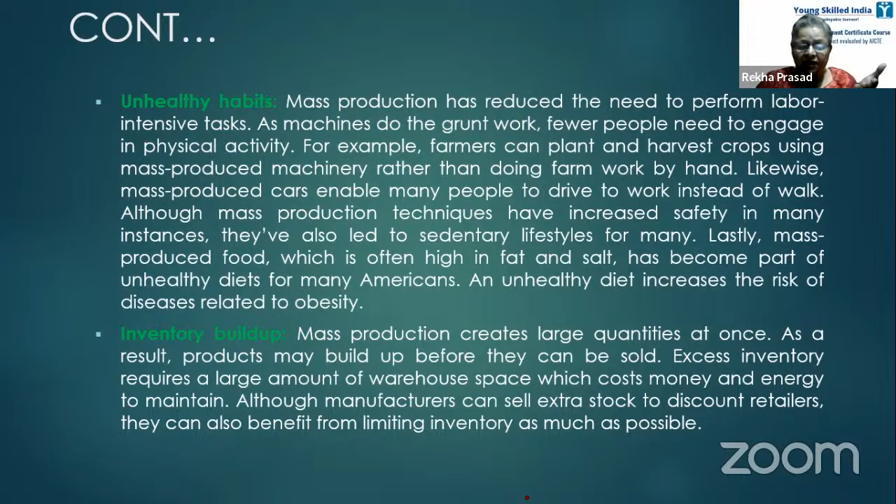अब क्या होता है, लास्ट मास प्रोडक्शन है तो इन्वेंट्री भी बहुत ज्यादा हो जाता है, because your inventory अब उतना बेच सको उस समय, उतने छोटे समय में तो ठीक है, नहीं तो you will have to have a space where they are kept properly, नहीं तो उनका फिर वैल्यू डिक्रीज करेगा। तो you have to be very careful with the inventory.

देन लॉस ऑफ जॉब्स फॉर अनस्किल्ड वर्कर्स। Loss of job for unskilled workers. Mass production fosters innovation, which has led to the development of advanced machinery. Today's systems are less physically demanding than they used to be, and instead require special skill and technology. This means manufacturers are hiring high skilled workers such as engineers and computer programmers, and leaving low skilled workers without a job. For example, according to the Bureau of Labor Statistics, about 7.5 million manufacturing jobs have been lost since 1980.

Furthermore, a 2017 McKinsey Global Institute report estimates that up to 800 million workers could be displaced by automation by 2030 around the world.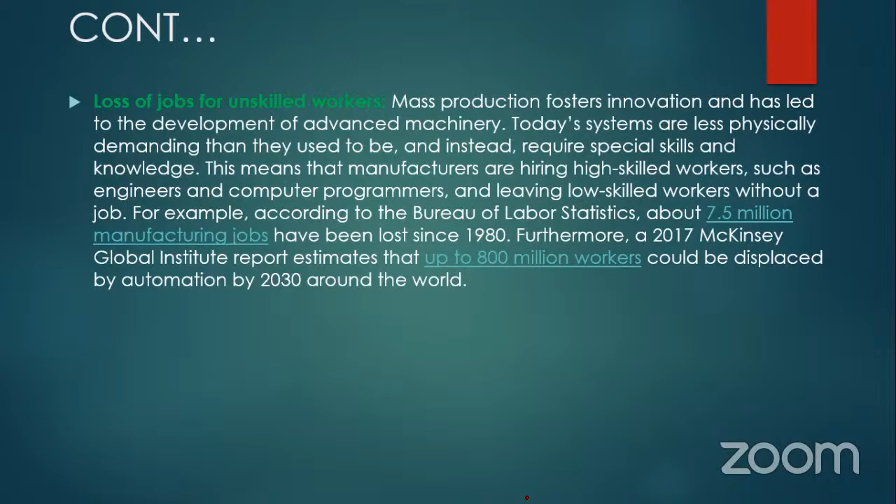आप लोग अपने आप को देखिए, why you are doing this? To upgrade yourself. आज वो बहुत important हो गया है। Even me at this age, I'm learning new things, new technology. If I have to be there in the market, I have to know all these things. So loss of job is there for unskilled workers, so you have to keep on upgrading yourself to become skilled workers and be in the market.

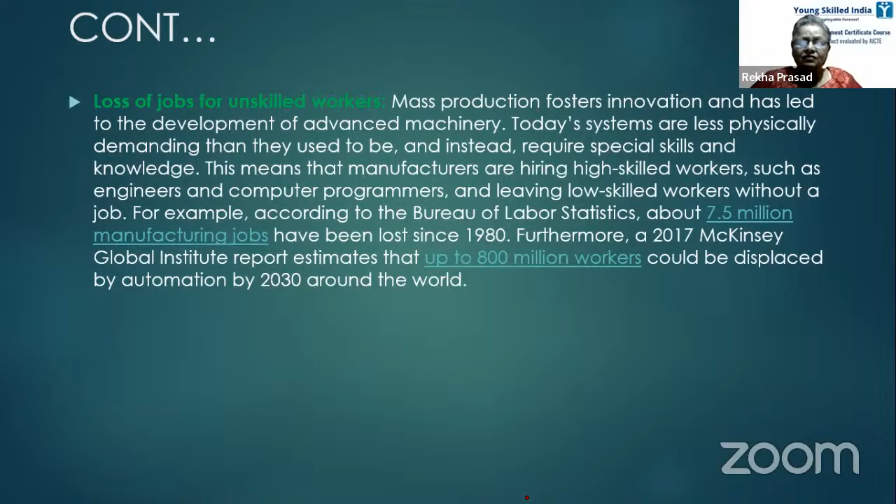In the importance of mass production: lower prices and greater access for all. Mass production enables people around the globe to acquire food, clothing, housing, medical supplies, car, and much more. In other words, it helps people survive and evolve.

Before mass production, goods were made to order. It took time for consumers to get the product they demanded, and time cost money. Today, manufacturers can quickly meet consumer demand and make a profit at the same time. Meanwhile, consumers save money because mass production is efficient.

Also, thanks to mass production, the average person has access to more resources. Wealthy individuals are no longer the only ones who can travel or learn a foreign language. The average person has access to technology that opens up a world of information and knowledge to them. Without mass production, the majority of people would not be connected to information and each other through devices like smartphones and laptops. You can see lower price and greater access for all.

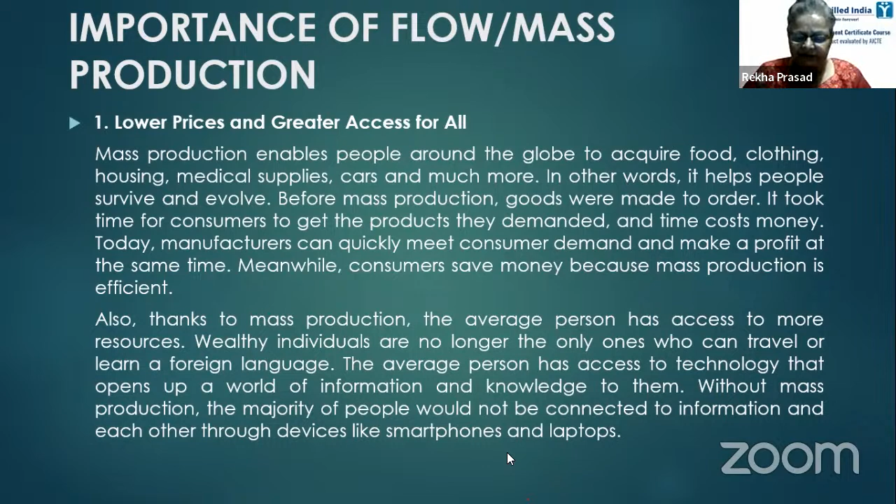Yes, continue. The bigger, the better for companies and consumers. Larger entities experience big savings when they have greater output, and this in turn allows them to offer lower prices to consumers.

This is because it costs less to produce large volumes at once than it does to manufacture small quantities over time. Large companies also save when they buy raw materials in bulk and use them for mass production of goods. They can also pass these savings on to consumers. In general, the bigger the entity and the more production power they have, the less it costs to produce goods.

So naturally, mass production has led to bigger companies, and bigger companies means more production. So naturally, the production cost is going down and quality is improving.

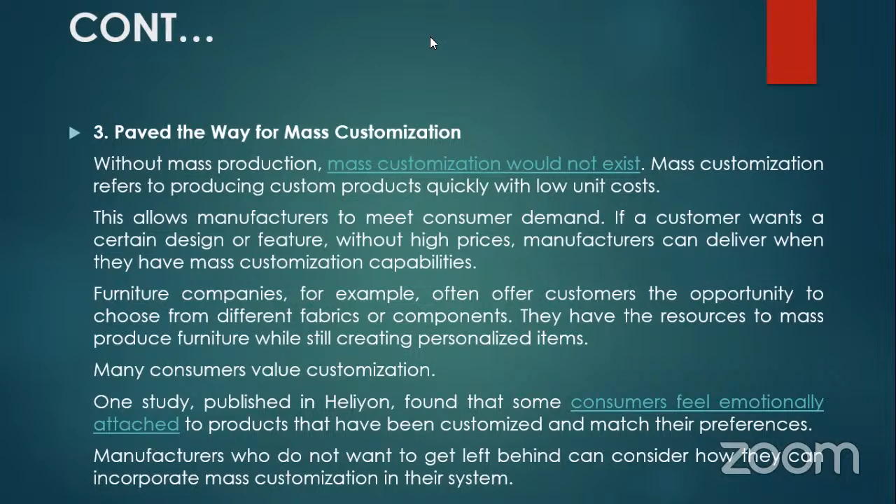Many consumers value customization. One study published in Heliyon found that some consumers feel emotionally attached to products that have been customized and match their preferences. Manufacturers who do not want to get left behind can consider how they can incorporate customization into their system.

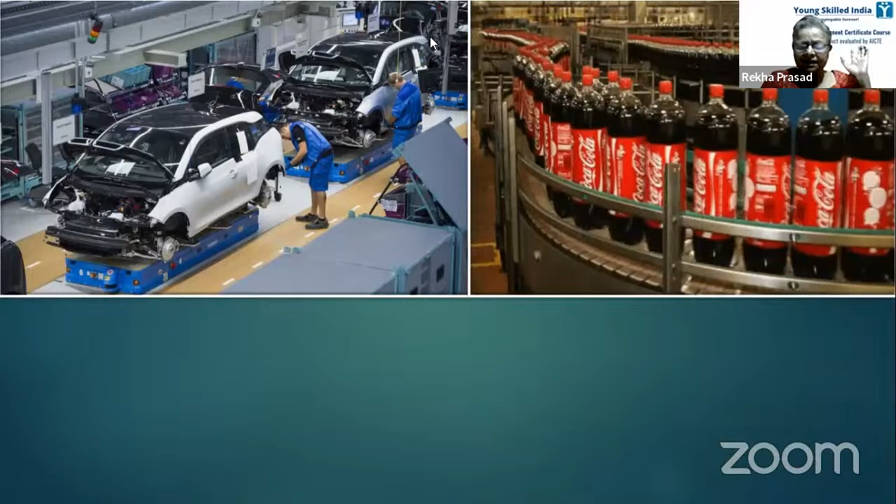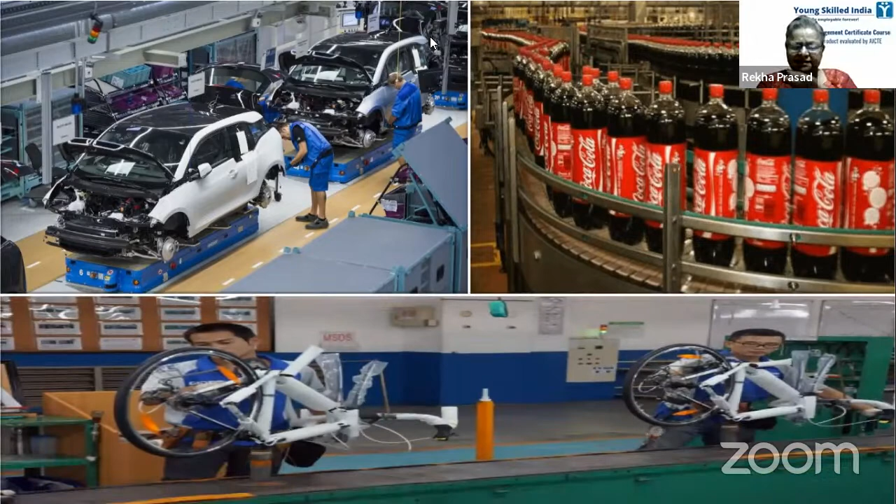So that is all for today. We have discussed in detail job production, batch production and mass production. You have seen that there are advantages and disadvantages, and it is the demand of the time which counts a lot.